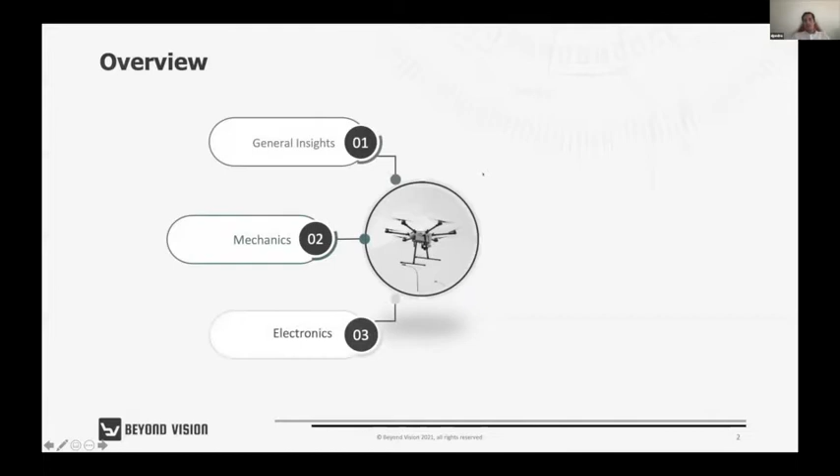So this presentation will be structured as follows. Initially, I'll go through the general insights of the presentation. Then I'll touch a little bit on mechanics of our UAVs, then the electronics, then the software part, or what makes the control and the algorithms on the drone. Also, we developed a custom cloud platform that allows us to control the drones in real time and handle all sorts of algorithms. It's called beXStream, will be the 5th point, and then some final results and what everything could be used for.

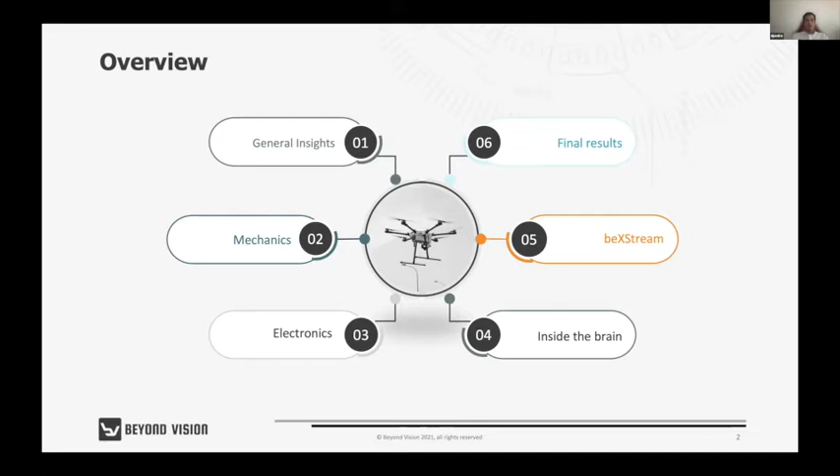So regarding general insights, Beyond Vision was initially founded in 2014. The idea initially was to just do R&D. And then the first years was exactly that the company did. In 2018, we had some really good results with...

I'm hearing some background noise, not sure if it was a question, so I'll just move forward. If you need anything, don't have any problem interrupting me.

So initially in 2018, we developed our first prototype. It was called HEIFU, and a lot of partners from research projects wanted to purchase it. So we couldn't do it because it was being used on multiple research projects. So we started enlarging the team and hiring new people so we could turn that drone into a product. And that's what happened in the following years. So basically, we developed all the ecosystem around that drone. We did the certifications and all the integrations required for the drone to make it a commercial grade product.

Due to the success of that prototype, we were invited to multiple new R&D projects. And right now we are one of the most, or the PDMFC group with the help of Beyond Vision is one of the most successful and one of the most involved companies in R&D projects, at least as a private company. We are in more than 20 projects right now. And we are right now also developing hybrid VTOL aircraft. So basically our aircraft have fixed wing and multi-rotor, so you can achieve way larger autonomies.

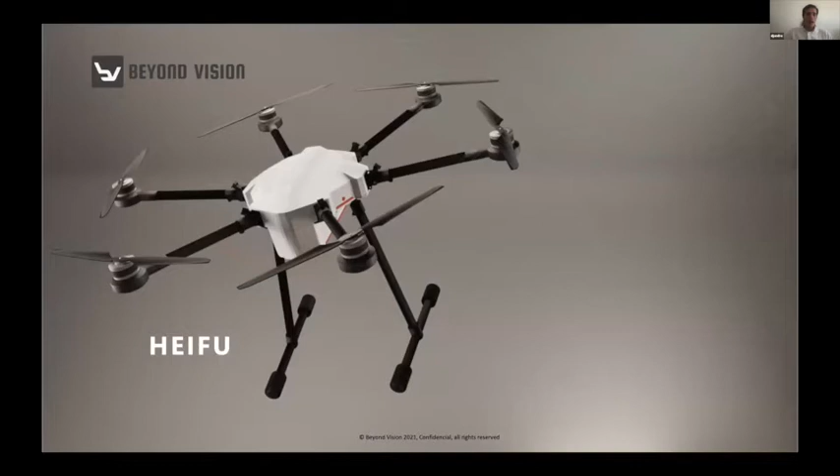So this is just a render of our main aircraft, HEIFU. It has multiple payloads that it's able to handle, and it quickly adapts to each of them. So multispectral cameras, 360 8K cameras, high definition and depth cameras, zoom cameras, thermal cameras, robotic arms, transportation box. Most of the payloads are really quick to adapt to the drone, and then you can control them through the platform.

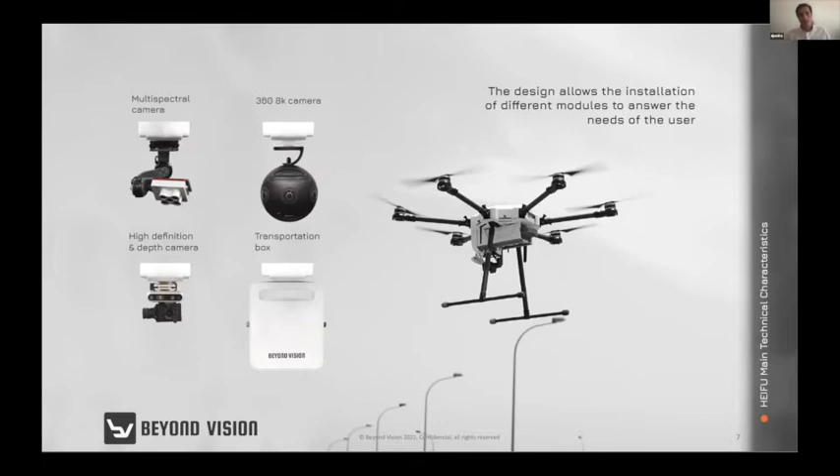For example, the 360 8K camera, we won an award because we were able to, via 5G, control the drone with AR glasses, and you could go wherever you want, wherever you're facing, and you just move the drone forward. The new aircraft that I was talking about are similar to this, the hybrid VTOLs. So they have fixed wing which extends autonomy, and multi-rotor, which allows you to do the operations that you usually do on a drone.

So, take off and land on with exact precision on one spot.

Regarding communications, the most used ones are Zigbee, Wi-Fi, 4G, 5G, and RTK communication with multiple base stations. We also have LoRa and Bluetooth, but those are just for specific use cases.

Looking in a bit more detail at the mechanics of the drone, we usually follow these steps. First a conceptual approach, then a feasibility analysis, followed by a simplified version of wing selection. Then we generate a CAD concept of the aircraft, do CFD validation, and with the errors from CFD, most of the time we have to rework the CADs. Then we trim the CG and CA of the aircraft, update the CAD model, and generate a structural design and analysis, which right now we're doing using ANSYS. This goes back to trimming the CG and CA. At the end, we do a fluid-structural interaction analysis, which most of the time forces us to go back to the CFD validation. Once we have a really good structural analysis, we move on to making the control surfaces.

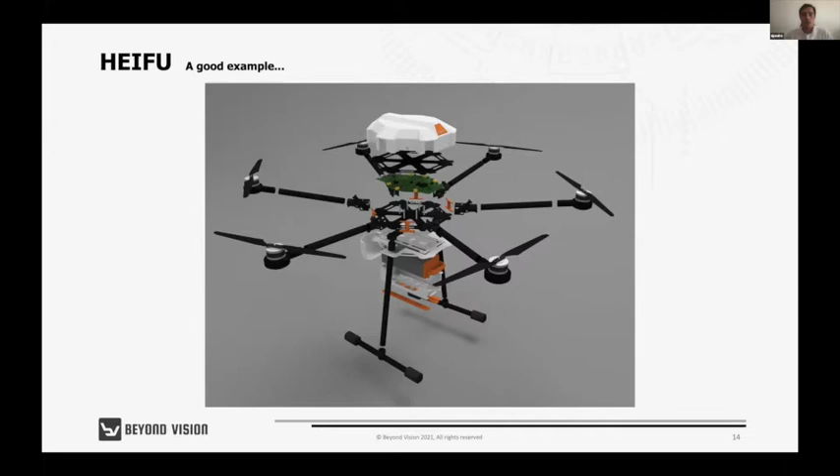I'll go into more detail with the HEIFU, because I think it's an easier drone to explain than the hybrid aircraft, and given the time we have, it's better to stick with HEIFU. This is an exploded view of all the components inside the drone, and we try to optimize it component by component.

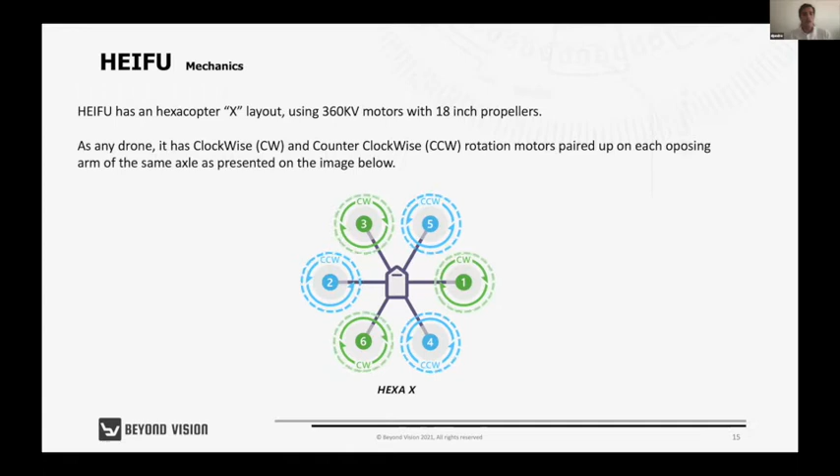Just a simple overview of how this kind of hexacopter flies. The X-layout hexacopters have six rotors, some rotating clockwise and others counterclockwise. With these motions you generate lift, and affecting some motors more than others makes the drone go in a certain direction.

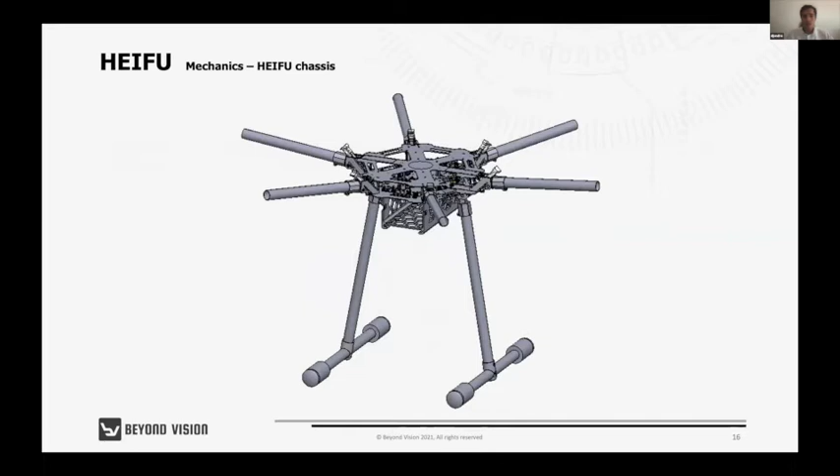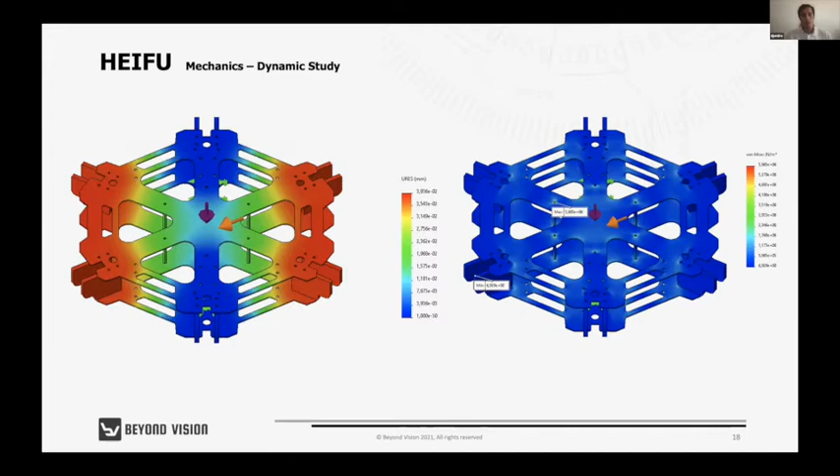Looking at the chassis of the drone, especially the center part, a mechanical analysis initially studies the static effects of certain movements of the drone, and then we do a dynamic study of the same effects. You can see the pressure areas that are mostly affected, and sometimes you need to redesign some parts to achieve the goals you want.

We also have to work on electronics. This is a rough idea of the electronic board we developed for our drone. It has a power area that handles the battery and the power options for the drone. It's basically a module on the bottom part of the drone that allows you to quickly adapt sensors, with a power switch mechanism so that when you swap between payloads while the drone is connected, it doesn't affect the normal control board.

On the board you also have a flight controller and a CPU board. The flight controller handles the flight operator controls and the flight mode of the drone, while the CPU board is usually used to run AI algorithms or communicate with the cloud platform. You have multiple internet connections and telemetry links, and for position we use a ZED-F9P for the highest precision possible, which integrates almost all the satellite constellations.

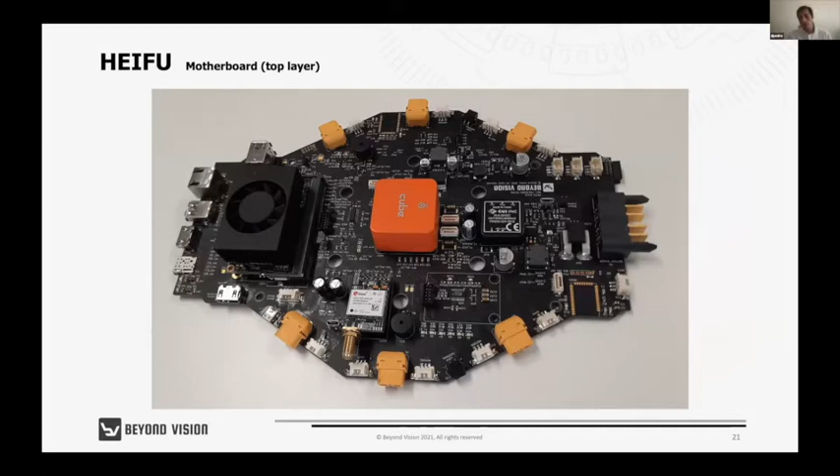Then we have the payloads and the motor connections, which are 24 volts, 40 amperes per motor, plus an autonomous landing gear mechanism. This is how the board looks: here's the computer module and the controller or flight unit, and on the bottom part you have some communication modules, for example the SIM 7600E, which is an LTE module.

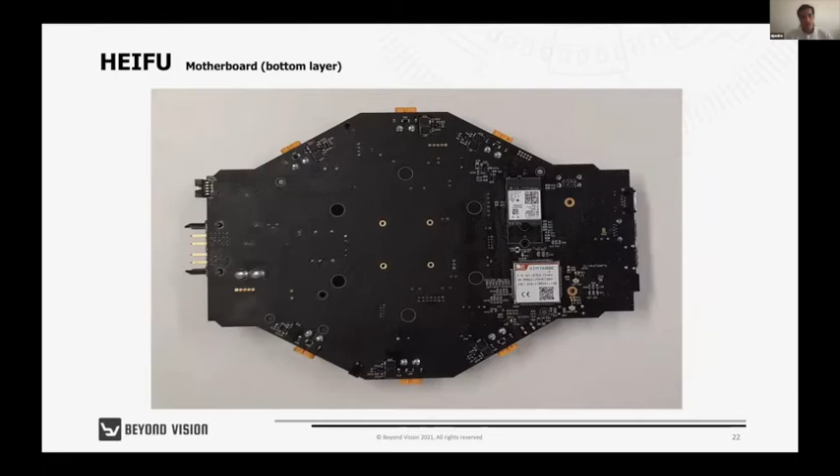We tried to start with open software, so we have a custom version of ArduPilot developed over PX4, and a custom open software module called HEIFU that was developed in ROS.

Regarding the collision avoidance algorithm, basically we have a module that is estimating the surroundings of the drone. With that, it generates GPU voxels. And then we have an algorithm that looks at the GPU voxels and generates a safe path or a minimum cost path, but also interpolates the waypoints that the user presented to the drone.

Then a priority manager looks at everything: the plan that the user made, if it's receiving any inputs, the obstacle avoidance algorithm, and the control states, and then sends information to the Mavros and the Mavros to the control on the drone. If any input of the operator is done, it usually takes control and makes a step forward and goes directly to the autopilot. So you're basically doing these 4 steps.

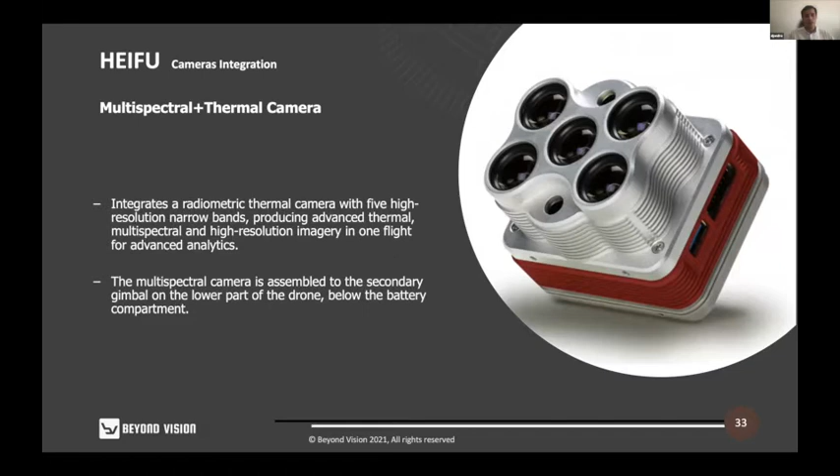These I'll go through really quickly, but are some of the payloads that we usually integrate on the drone. So depth, high quality cameras, depth cameras, multispectral cameras - usually used more for agriculture purposes. FLIR Vue Pro R is a thermal camera. There's the Altum camera that integrates multispectral with thermal, the 360-degree cameras, and then LiDARs.

We use the Velodyne Puck for most standard applications, but we also have the Ouster OS1 already integrated with the drone. The advantage of this LiDAR is that it also gives you some information regarding each point that it detected, information such as some indices of reflection of that point.

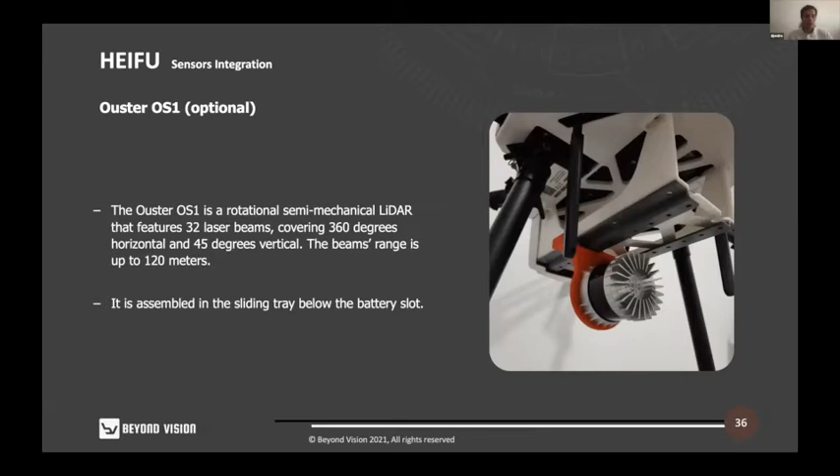And then we can go to the last part of our development, that is the BEXSTREAM Clouds platform. So basically, the fundamentals of this platform is that it's capable of remote controlling multiple drones at once. When we started this application, we had the concept idea to have a completely distributed application where no pilot was needed and someone could stay on a cloud, let's call it that way, and control whatever drones they needed and just look at the results afterwards.

And then we made it in such a way that it's suitable for small and large enterprise. So basically, on large enterprise, you can set up everything from roles, different permissions, different users, different areas, and you combine all of that to have different panels, so to say, for each user.

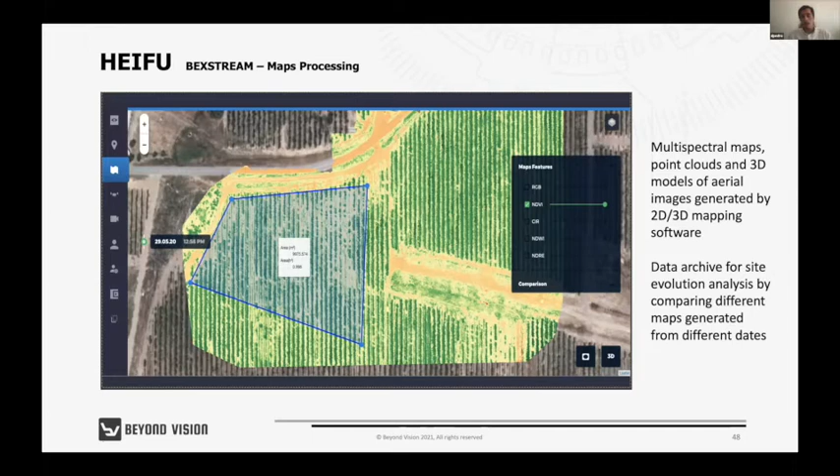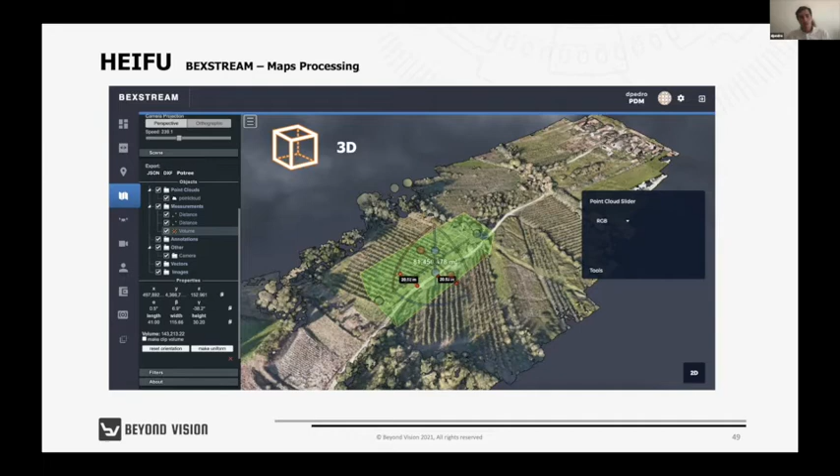You can also do some 3D analytics. So, for example, if you want to estimate a farm productivity, you can generate a point cloud or a 3D map, so to say, and then measure a volume of a certain region. These volumes are convex Hull volumes, so basically it just calculates the volume of the overlaying mesh to the bottom. And with that, you can calculate or estimate the productivity of a certain region.

And this was everything from my side. I'm not sure if you have any questions.